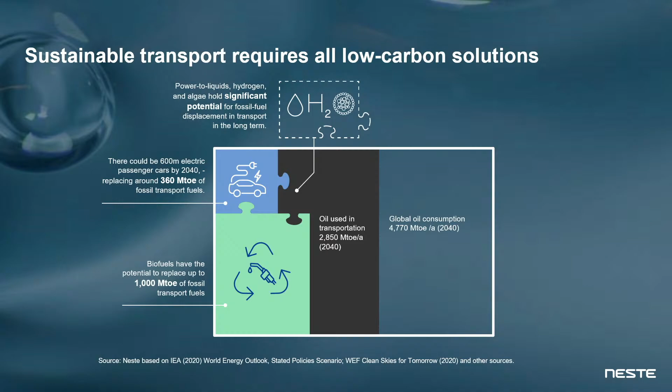So if we look at that picture, the conclusion is very clear: if we want to hand over a healthy planet to our children, we don't talk about a competition of technologies, we talk about a joint race here against climate change. This means we basically need all solutions in place to fight climate change.

Our contribution to that race against climate change, which is also present here on the IAA, is the renewable diesel called Neste MY in a neat form. We see here a fuel which provides greenhouse gas emission reduction by 90%.

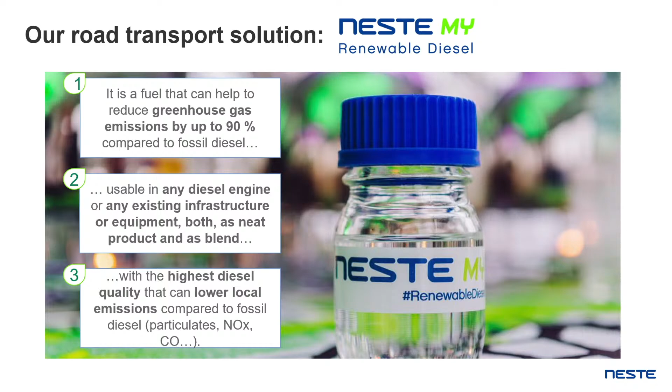We see that this is usable in any existing diesel engine with the existing infrastructure, both in a neat but also in a blended version. We have OEM releases from all of the big manufacturers in place. If you walk around here on the IAA and look at the fuel tanks of the trucks, you will see this XTL print on it. This truck is ready to use Neste MY renewable diesel.

All of this comes along with the highest diesel quality, so we see a technical superiority compared to the fossil fuel. We have excellent winter cold performance up to minus 22 degrees Celsius constantly. We have a very clean combustion process with a very high cetane number, which lowers the local emissions dependent on the exhaust gas treatment of the engine regarding NOx and so on and so forth. So this is our contribution to make a difference in this race.

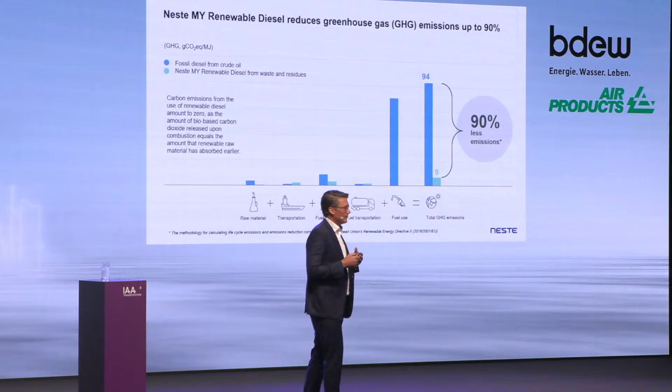Now let me move on to explaining how the fuel is considered throughout this process of production. Neste pays pretty much attention to monitor the carbon intensity throughout the entire process, from sourcing the raw materials until the use case of the fuel.

I'd like to highlight basically two points in this slide. The one is fuel refining. You see in comparison the blue chart showing the carbon intensity from crude oil compared with the green part, which cites the Neste MY carbon intensity. You see that our refining process is less carbon intense compared to the traditional oil refining process.

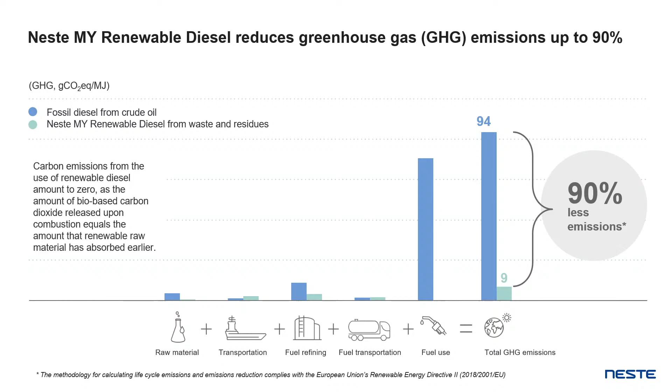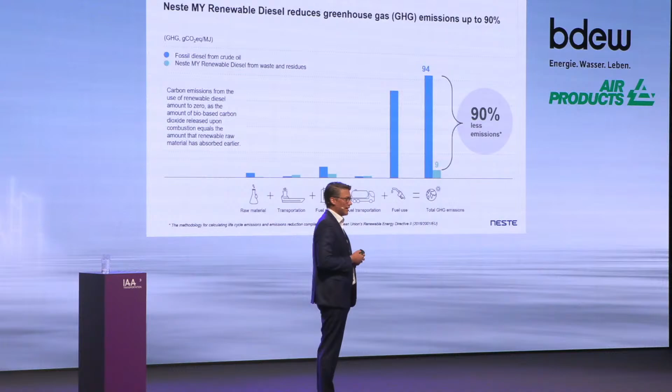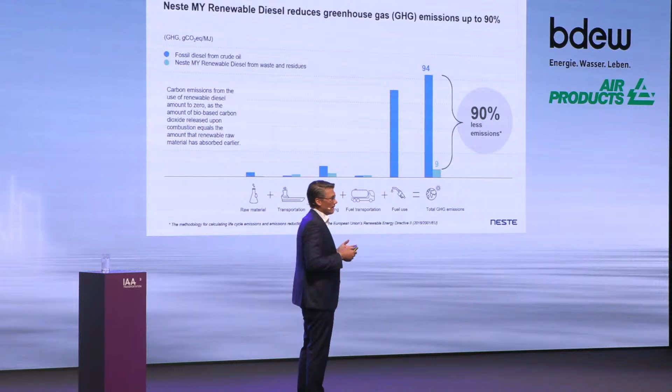The second important part: in the case of using the fuel, we don't emit any fossil molecules into the atmosphere, because our molecules are basically recycled - taken from the atmosphere and then emitted to the atmosphere again. All of this is in compliance with the RED II directive. We achieve 90% CO2 emission reduction with this fuel. Sustainability is one of our core values, and that sustainability promise is closely linked with our fuel, Neste MY.

If we look at the availability of Neste, we have 600 stations already across the global network, in 28 countries where you can basically already get the fuel. We have more than 4,000 business customers served from our sales force and from our channel network.

In Germany, just this year, we decided to launch the Neste fuel brand Neste MY. We already have access, in the context of the Clean Vehicle Directive, to public fleets, transportation, and off-road applications. Nevertheless, we cannot provide the full range of defossilization inside Germany. We are waiting for an opening of the regulation which helps the transport sector get access to this fuel and unleash the defossilization potential completely.

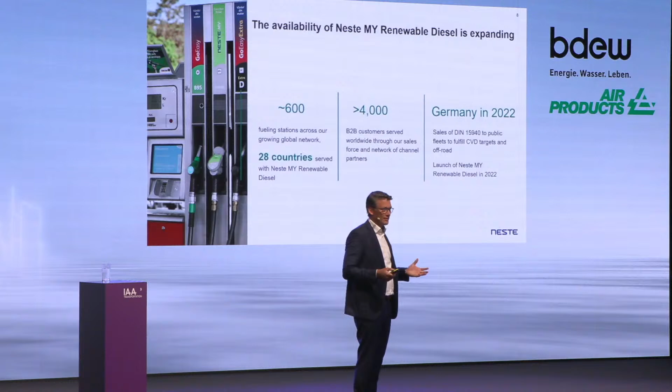We see that regulatory ambition levels are increasing in Europe and North America. We see new markets coming up outside of Europe and North America in the APAC region. And we also see that voluntary demand to decarbonize is catching up. Nevertheless, we believe that supply and demand will grow in parallel with each other. So circling back to my question, can the supply meet the demand? Yes, it can.

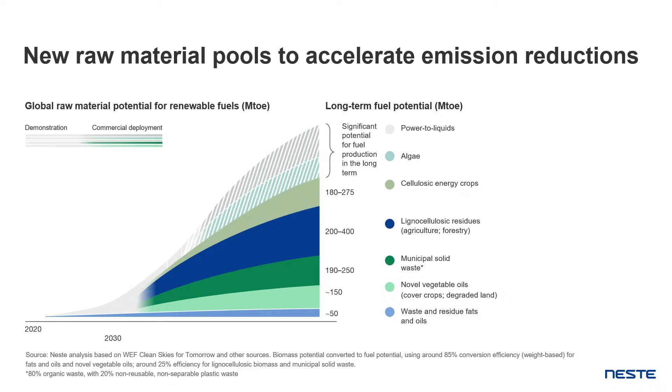We're listing here just a few, like novel vegetable oils, municipal solid waste, lignocellulosics, and last but not least, I would like to mention algae as a potential source for additional feedstock. All of this adds up to why we strongly believe the 1 billion ton figure in 2040 is a realistic scenario. So again circling back to the question, is there enough feedstock? Yes, there is enough feedstock.

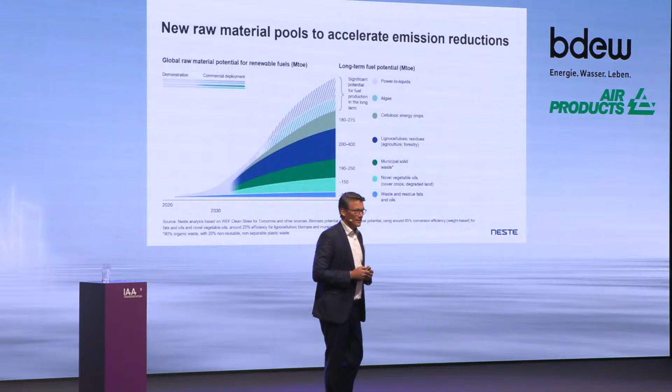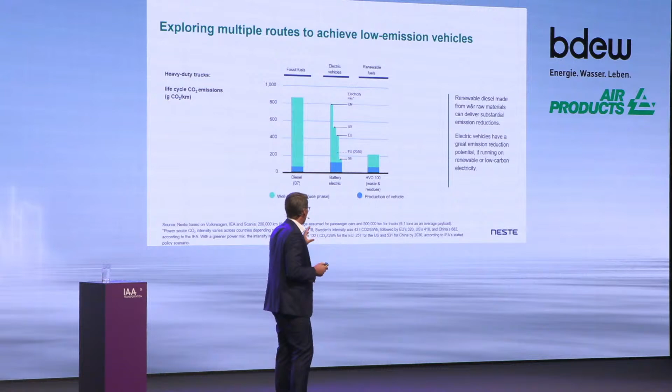On the left-hand side, you see a truck running on generic fossil fuel. The blue part is the energy consumption from production of the vehicle, and in green, added up, the wells-to-wheels emissions from the use phase. In the middle, you see a comparison of electric vehicles with different energy content. On the right-hand side, you see a traditional truck powered by our fuel, Neste HVO.

What's necessary to mention is that, of course, the defossilization potential of an electric vehicle depends on the energy you put into it. Let me cite the European part of the story: we have a carbon intensity of around 320 tons of CO2 per gigawatt hour on average in Europe, and we hope the dotted line will someday become reality in 2030, bringing it down to 130 tons per gigawatt hour. Sweden is already quite green, so this is the current state there, already at 43 tons.

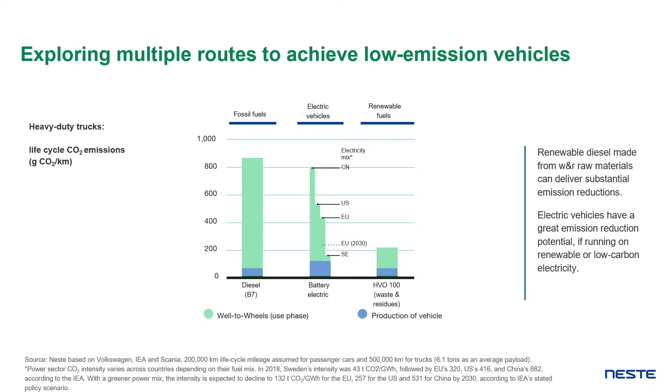If we move our view a little bit to the right, you see that with a traditional truck just using our fuel as a drop-in solution, we are capable of massively minimizing the carbon intensity of the vehicle, and this is already in practice today. We are running trucks from MAN, Iveco, and Scania, located in hall number 11, with our renewable fuel. So it's a solution which is basically here and now, already available.

Let me conclude the presentation. There are good solutions already existing to decarbonize today. The point is we really need a regulatory environment which helps us unleash the full potential of the solutions we have in our hand. It's not a technical competition, it's a joint race against climate change.

Renewable fuels have significant scalability. We have the feedstock, we have the production capacity. And last but not least, both electrification and renewable fuels are needed, and we need them right now. Thank you very much for your attention.